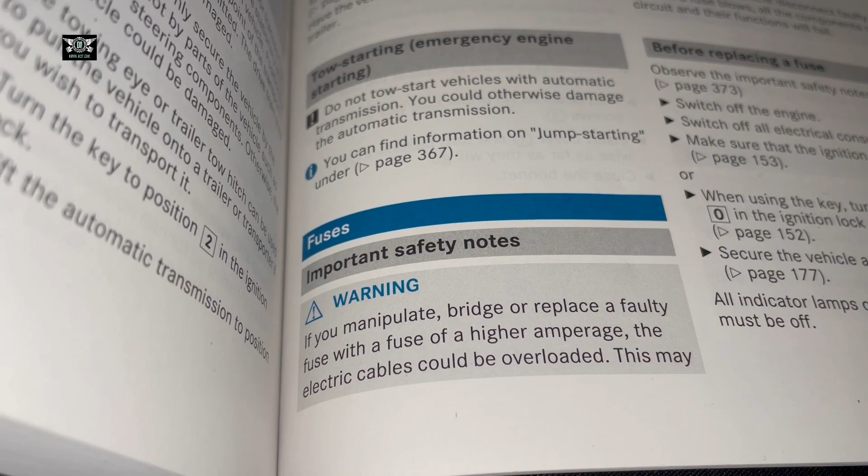So if you look at your manual, if you have one, and you open page 373, it says fuses, and it gives you a number of warnings and how to change fuses and whatnot. So it's a good idea to always check.

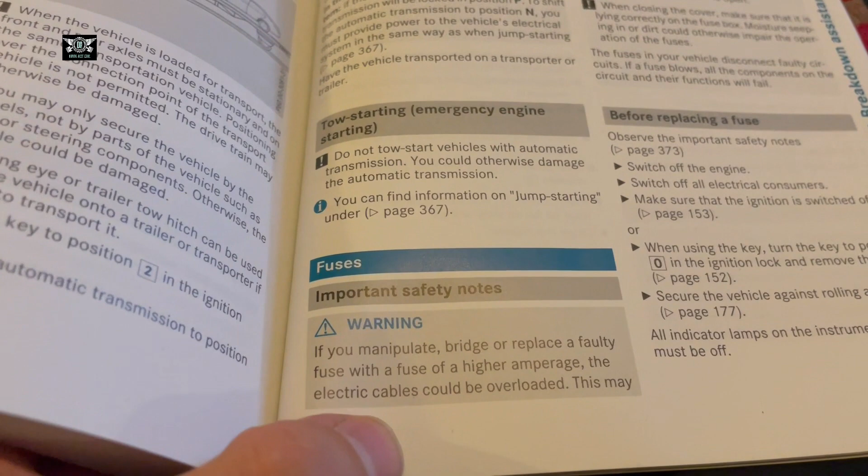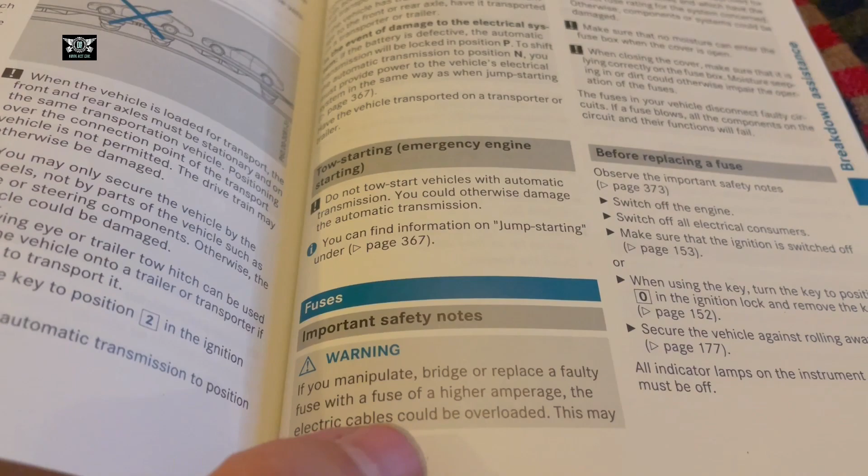As I was saying, it's important to read the warnings here that they give you, such as telling you not to replace fuses with higher amperage fuses, or try to bridge fuses or whatnot, because you can cause other kind of problems. You can even cause a fire.

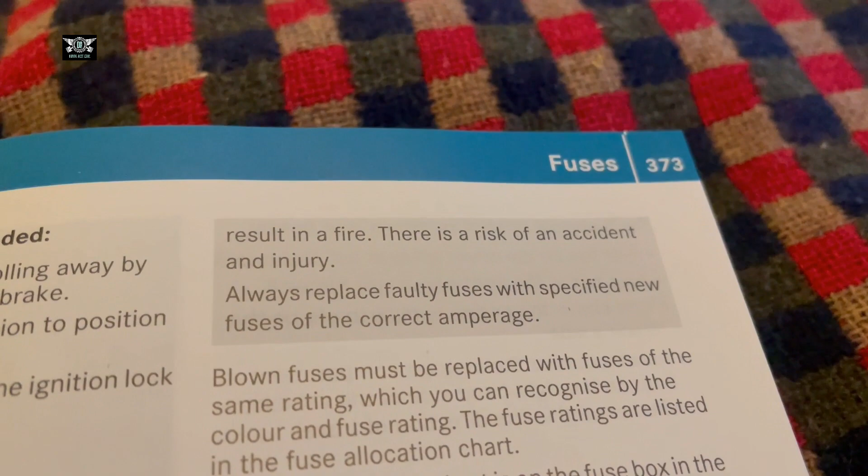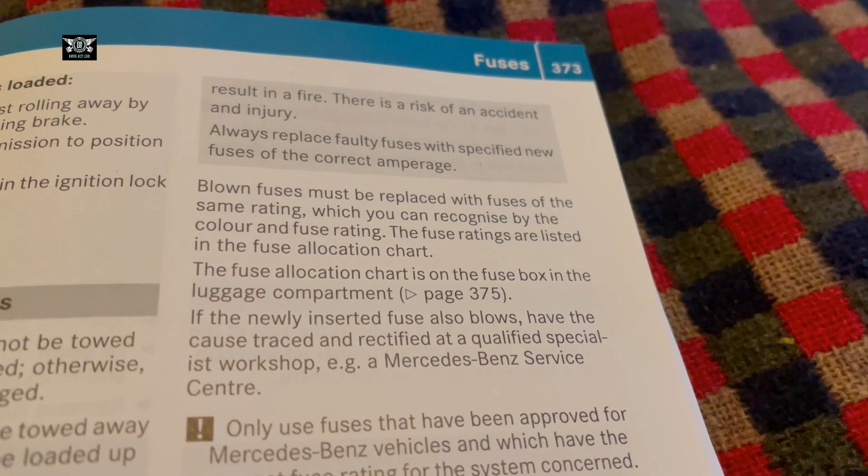And as it says, there is a risk of an accident and injury. Always replace fuses with specific new fuses of the correct amperage. So just follow the instructions here.

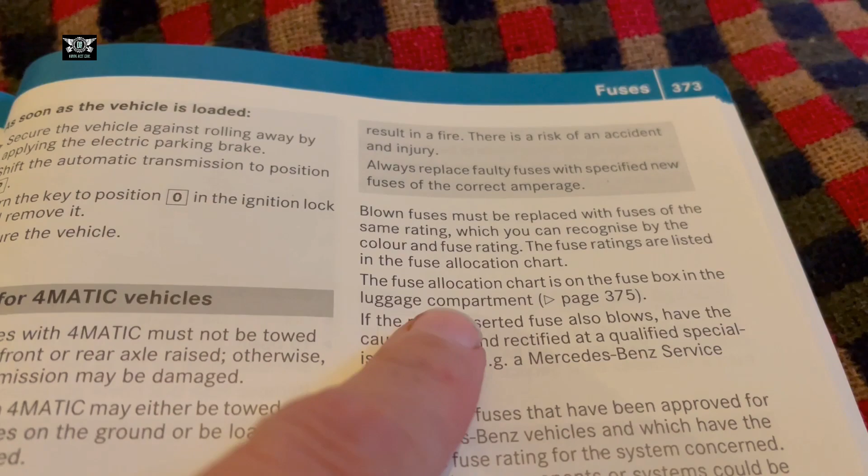Also tells you the chart. So the fuse allocation chart, it's on the fuse box in the luggage compartment. So that's where I got that from. I just took it out in order to put it on the video here.

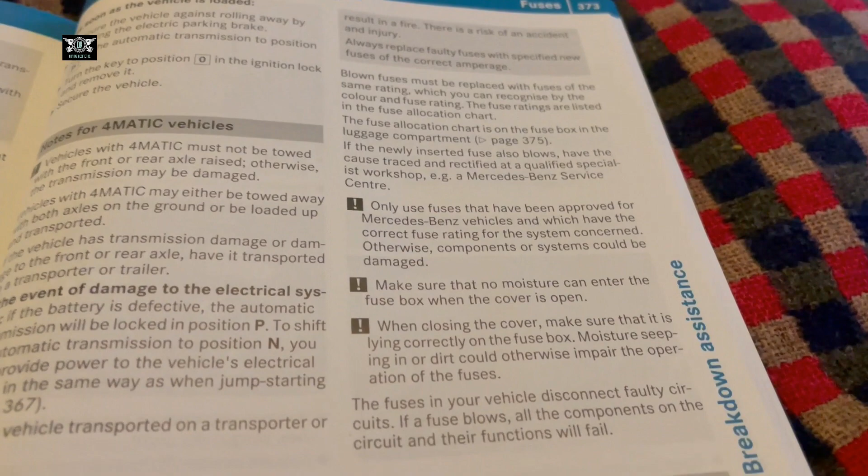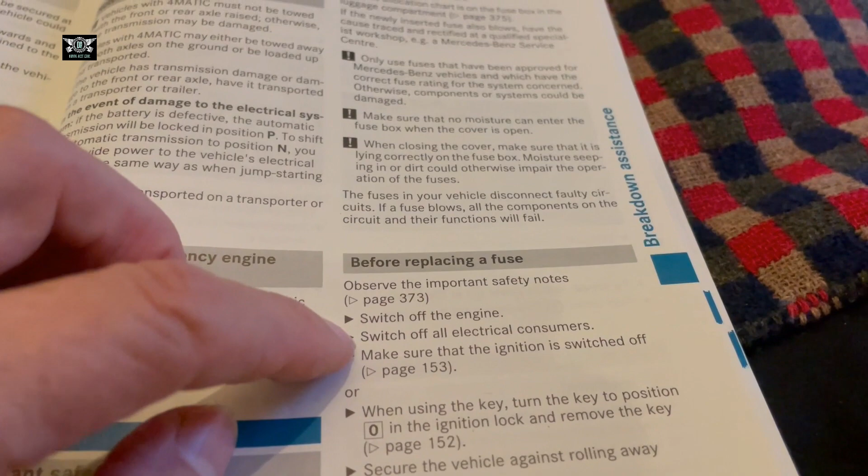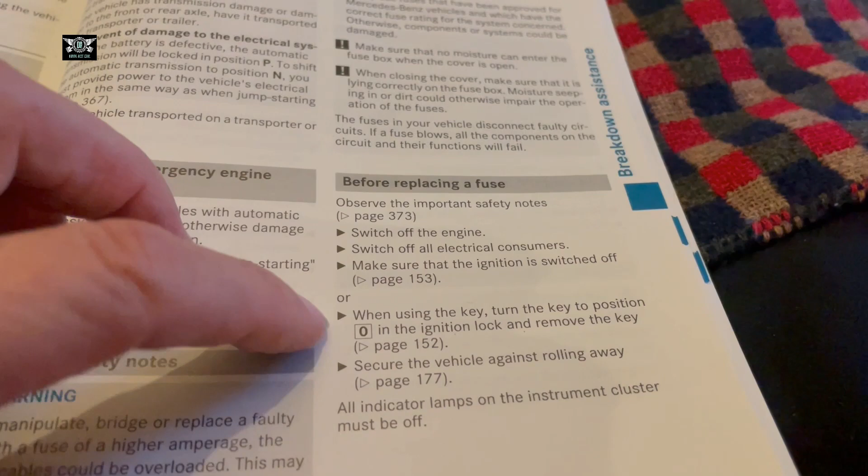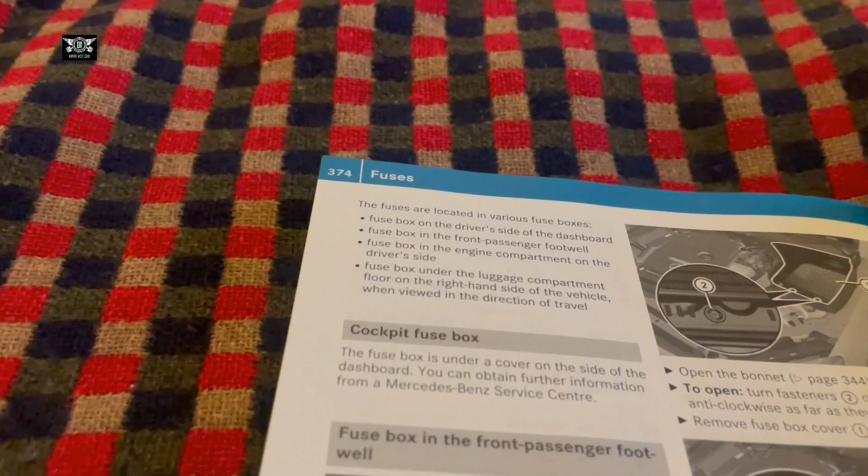And then you'll come to this place here where it also tells you, before replacing a fuse, observe the important safety notes. Switch off the engine, switch off all electrical consumers, make sure the ignition is switched off, or when using the key, turn the key to position 0 in the ignition, lock and remove the key, secure the vehicle against rolling away and whatnot. So just follow the safety procedures that they give you.

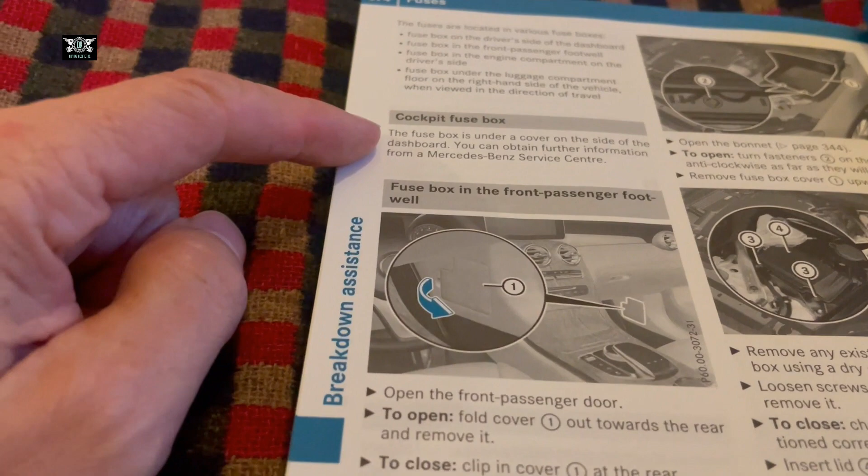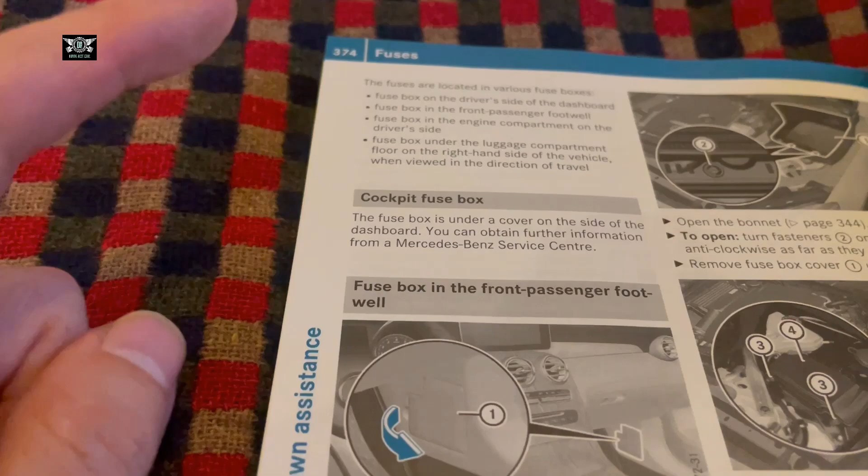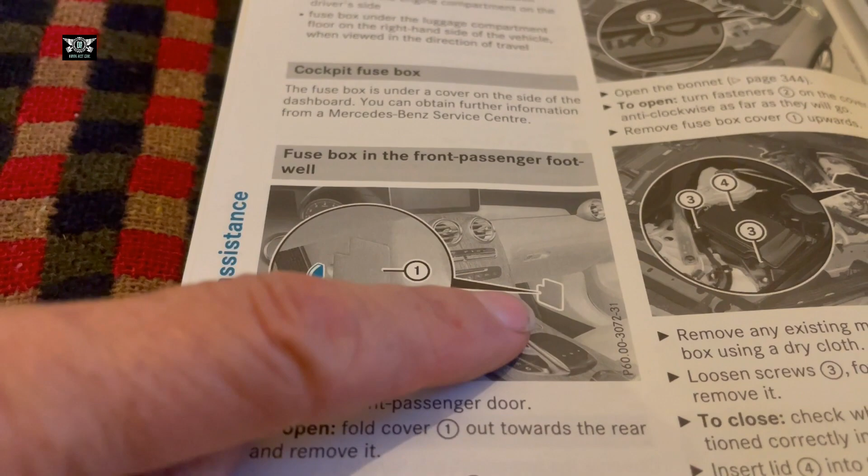So there are fuses in the cockpit fuse box. The fuse box is under a cover on the side of the dashboard. You can obtain further information from Mercedes-Benz Service Center, and this is where they are telling you the fuses are. So they are on a panel on the side as shown there, and we'll have a look at that.

In this picture, they're showing you a left-hand drive, but the car I have is a right-hand drive. So the steering is on this side, and this box is on the other side. So we'll have a look at that anyway.

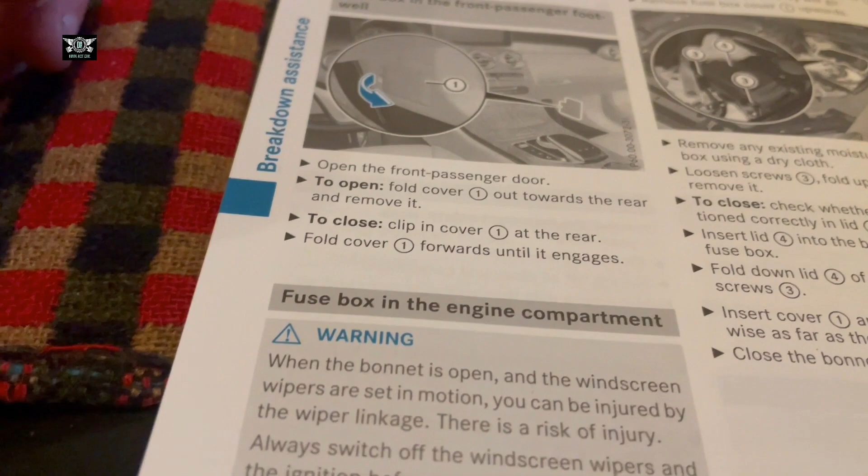And then you have fuses in the engine compartment. Again, you have another warning there. And for the fuses on the engine compartment, you need to remove 2 little tabs and then lift the cover up.

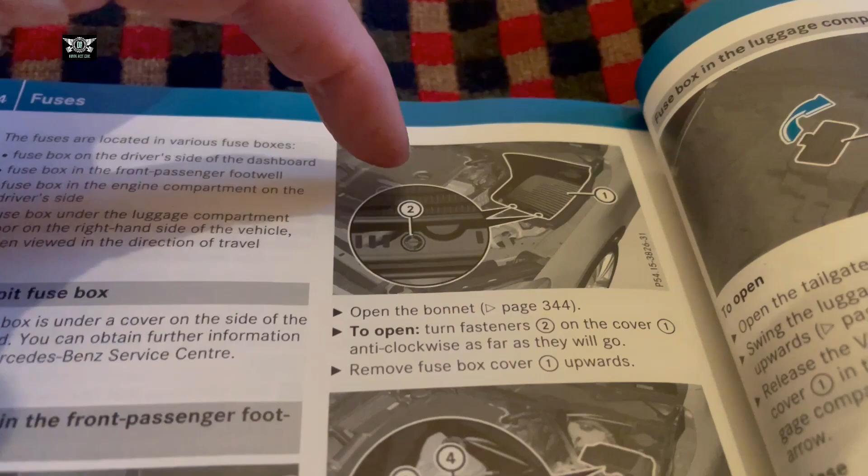Now again, this picture is showing you the right hand side if you're in front of the car. However, in this model it's on the left hand side.

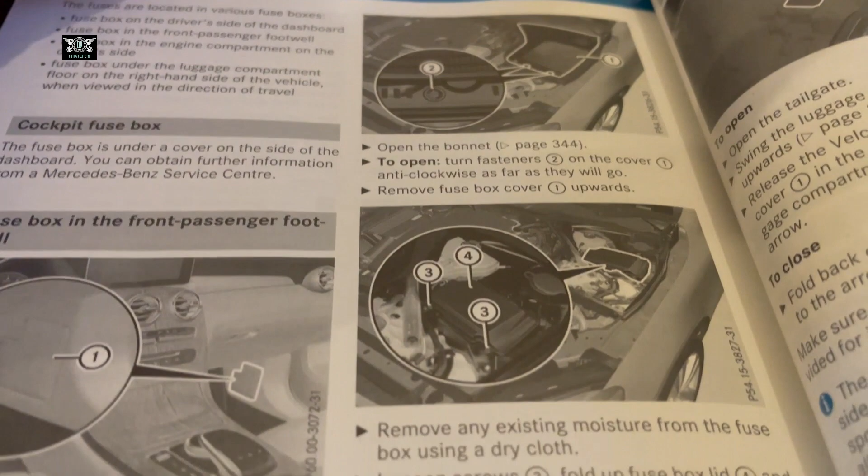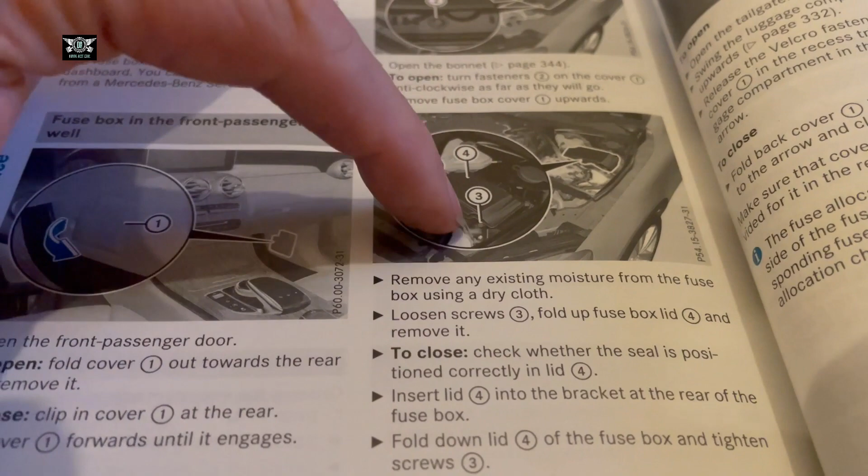And then once you lift that cover, you'll see the fuse box there, and you need to remove some Torx screws, 3 of them. Loosen the screws and fold up the fuse box lid and remove it. So we'll do that in a minute.

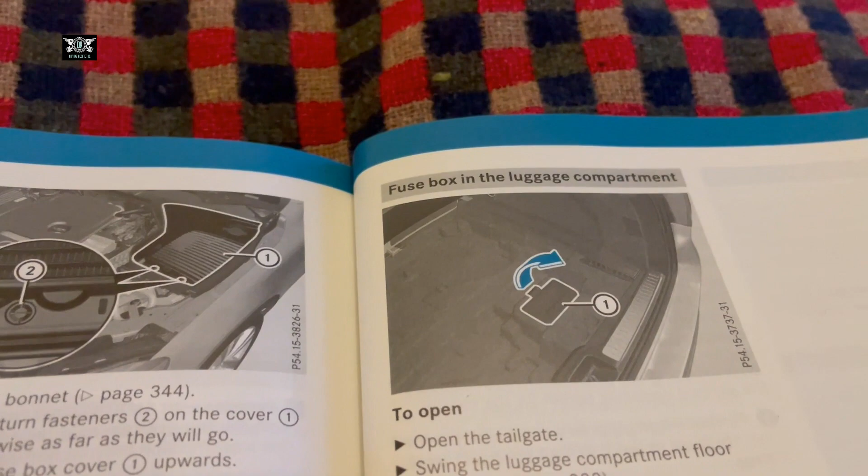And then we have a fuse box in the luggage compartment. So you open the boot and you will find a bit of carpet that is covering the fuse box. So again, we'll have a look at that in a minute.

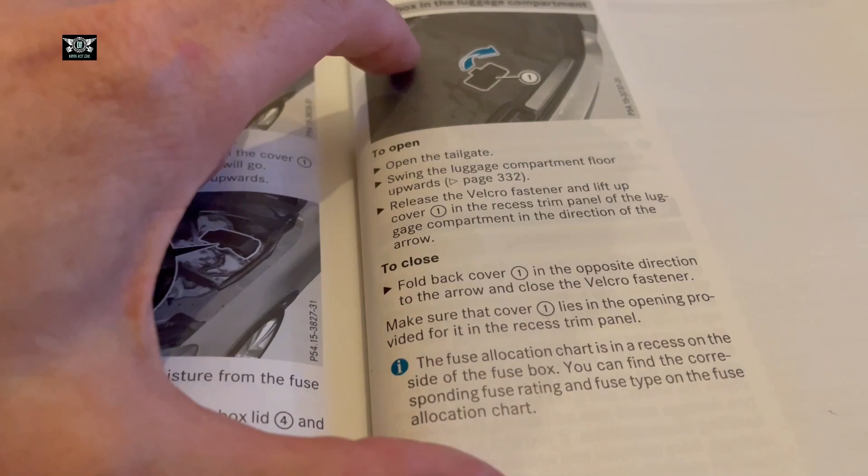And now here you can see, we'll concentrate on this list here because this is the English bit. This is German, I think.

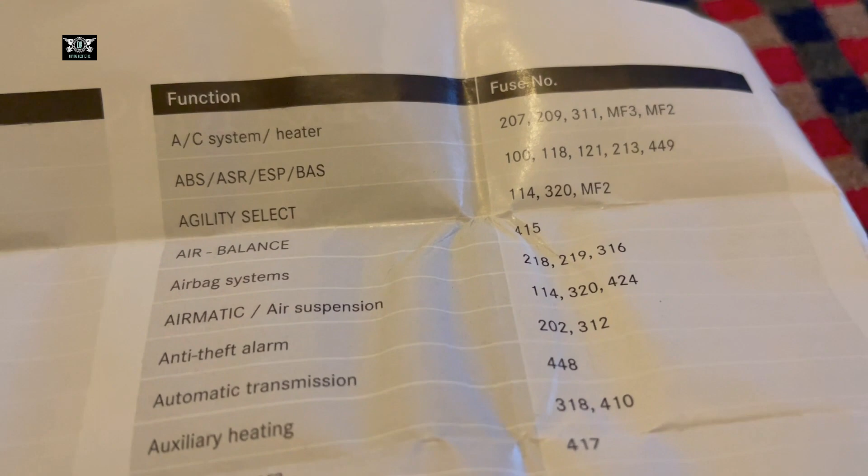I'm just going to slowly go down here, and if you're looking for a specific fuse, then you can pause the video as we go along and have a look.

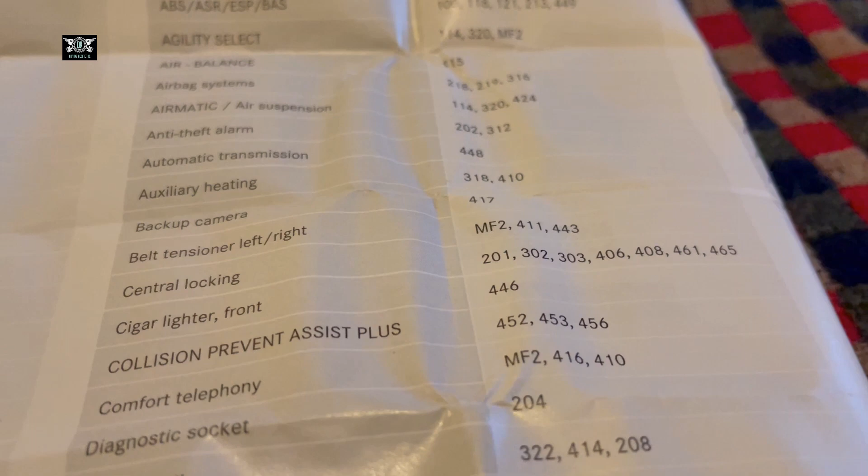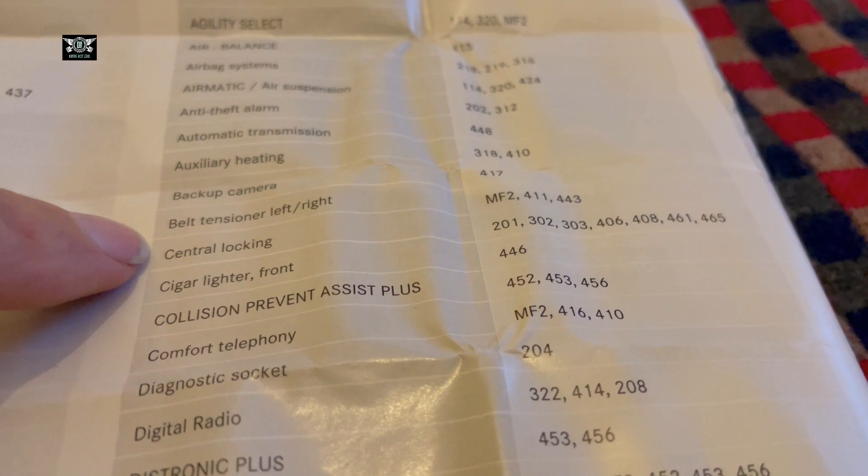Another thing to note is that if you're looking for a specific fuse, something like central locking, for example, you can see that central locking can be managed by quite a number of fuses there. So you do need to check them all.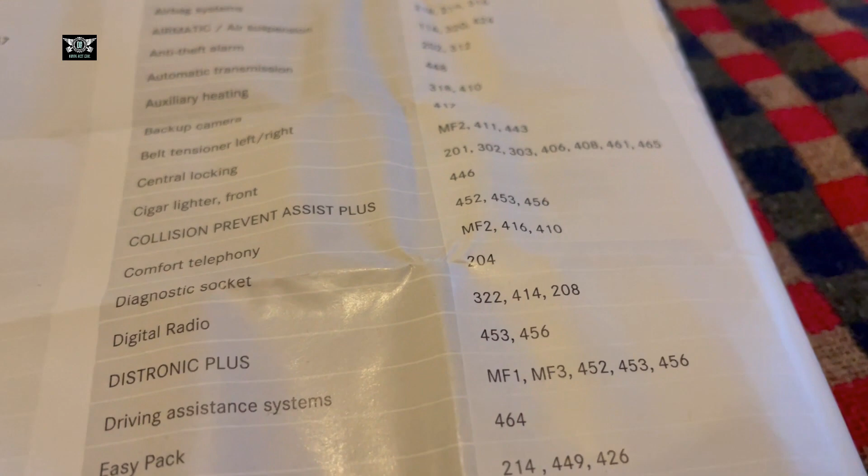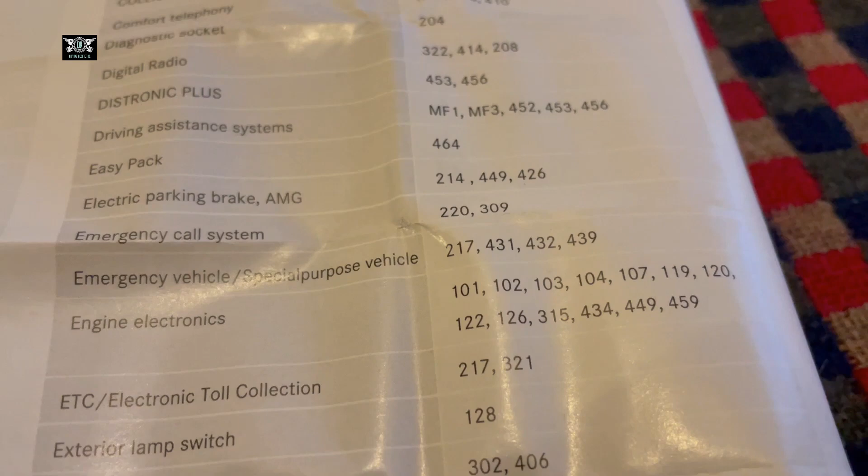Some of those may not be allocated in a fuse box. It just means that because those systems are shared, if your car doesn't have those extras, then you won't have the fuses. So not all fuses will be on all the slots. That's just something to remember.

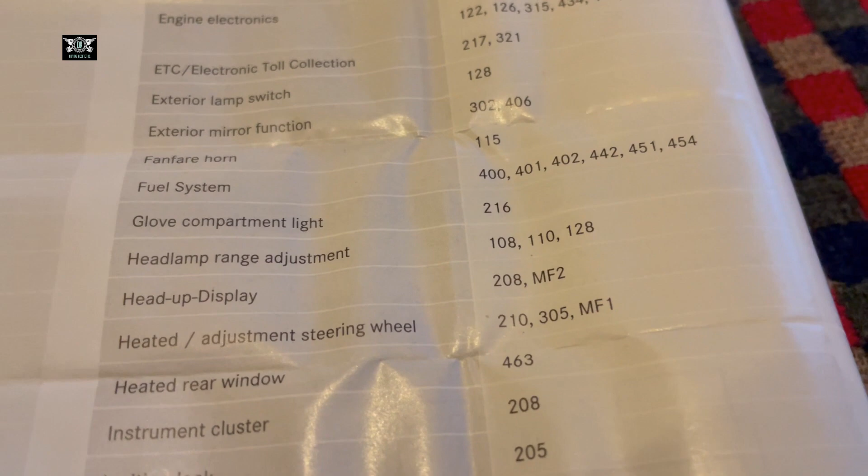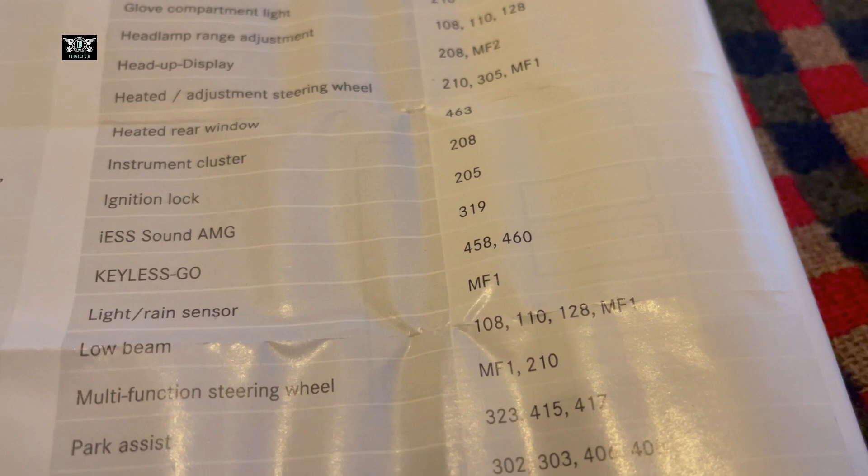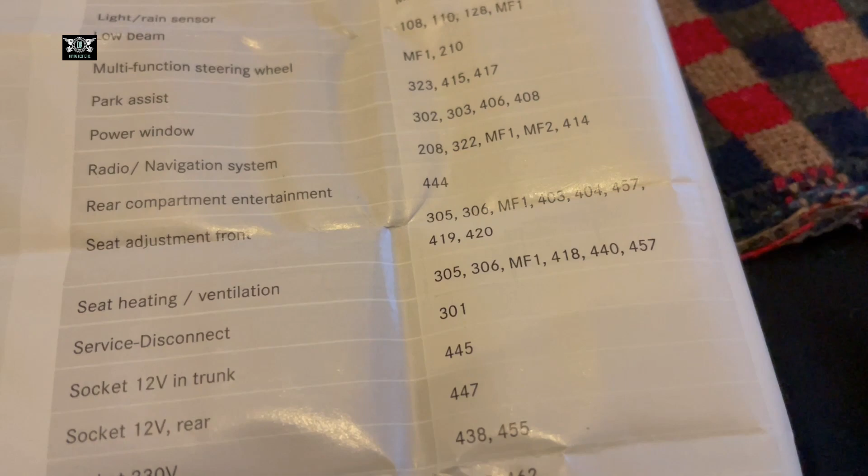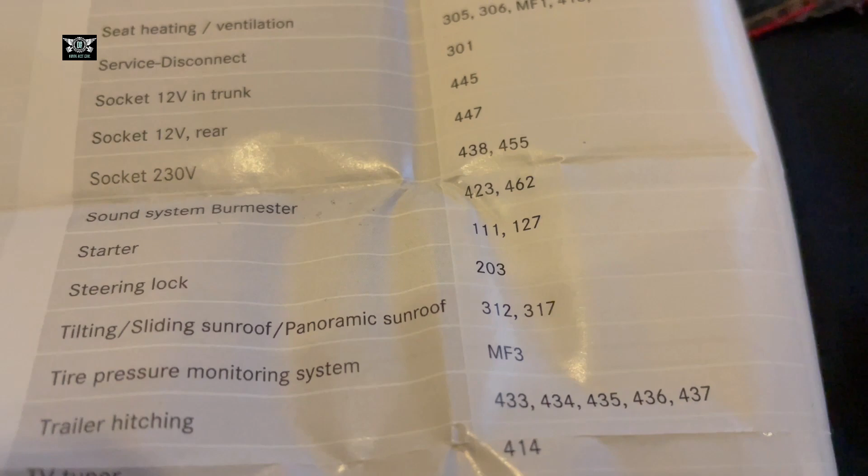And another thing is, this model I have is a diesel automatic, the 220 diesel. If you have a different version, if you have a manual, or you have a different engine size and whatnot, then this chart may be slightly different. So don't just rely on this chart for all the cars out there. This is for a GLC.

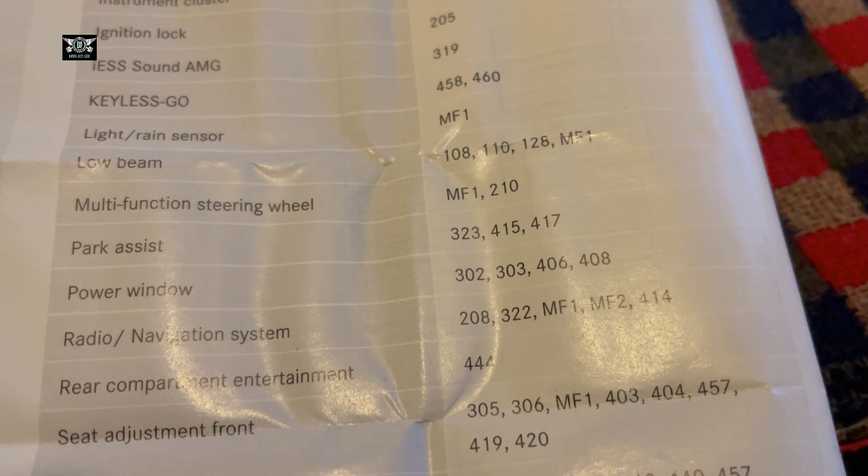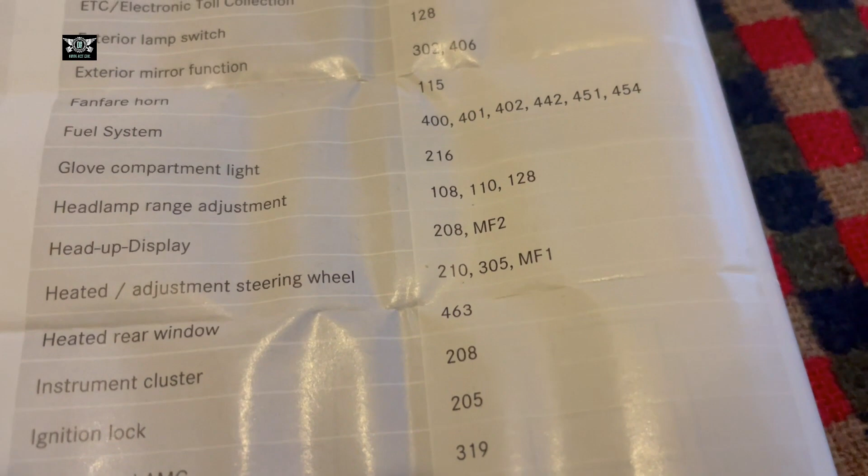However, just remember that not all GLCs will have the exact same allocations. And also this is a 2018, so the 2022 might be different.

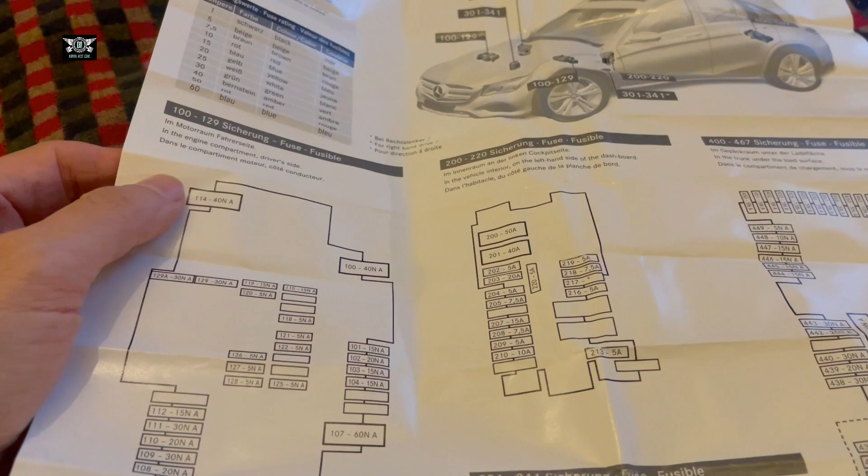So there we are. And also on the back of this chart, they also show you the fuse boxes and how the fuses are numbered. So it's a good idea to have a look at this chart.

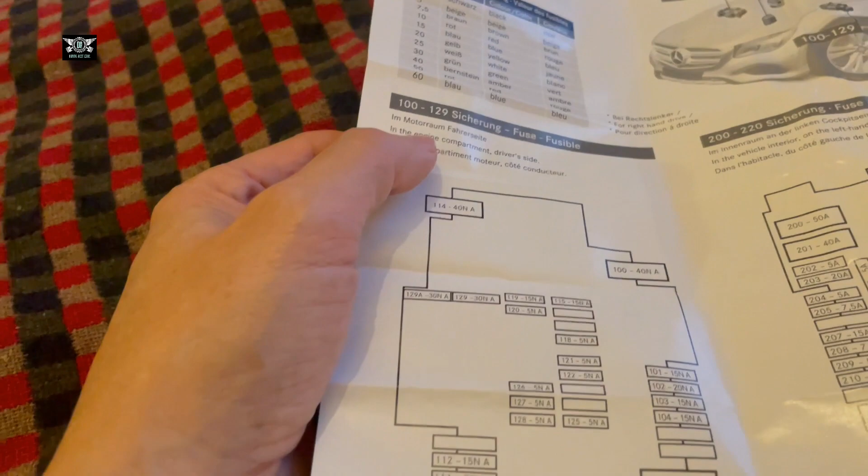So in the engine compartment, driver's side, it's this fuse box. We're gonna have a look at that. You can see the allocations for fuses, fuse numbers, 108, 9, 10, 11, 12, and whatnot. 128, 100, 114.

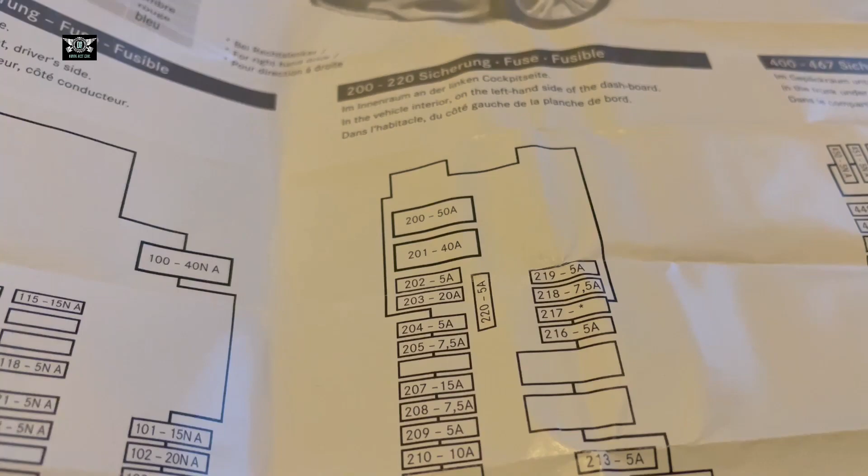Then it says in the vehicle interior on the left hand side of the dashboard. So this one here. So if you look at that number there, it's showing you that.

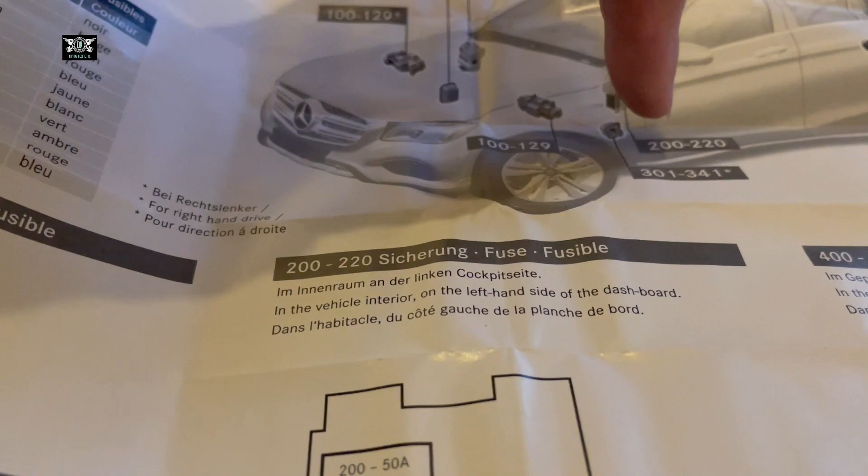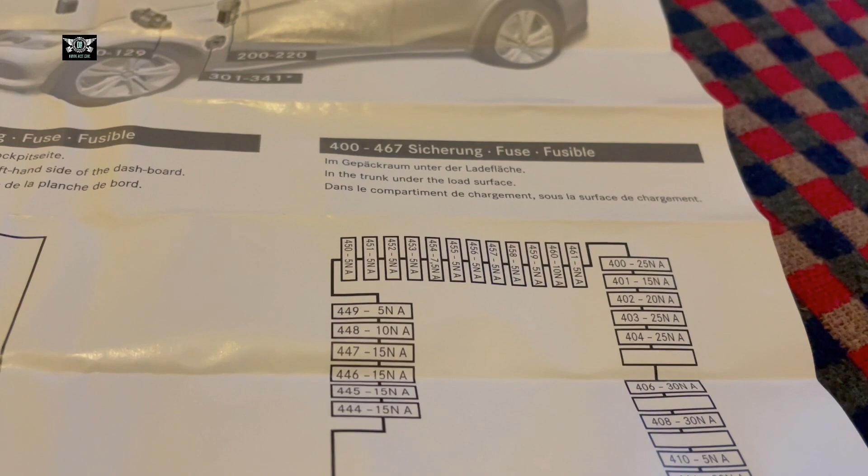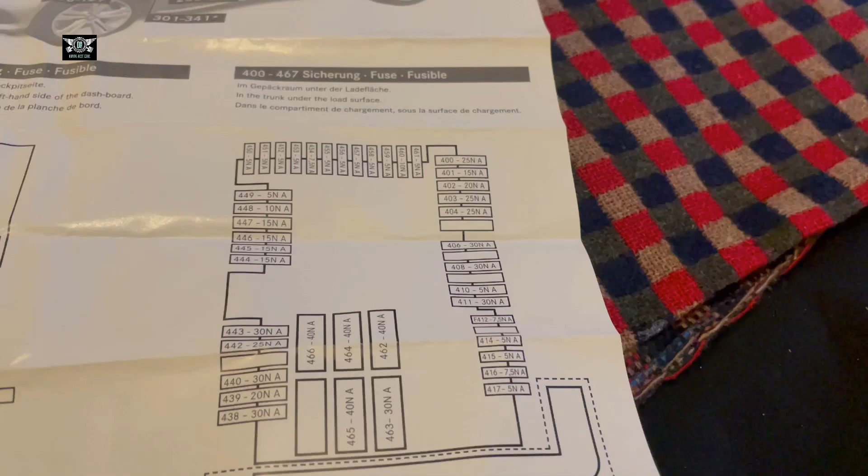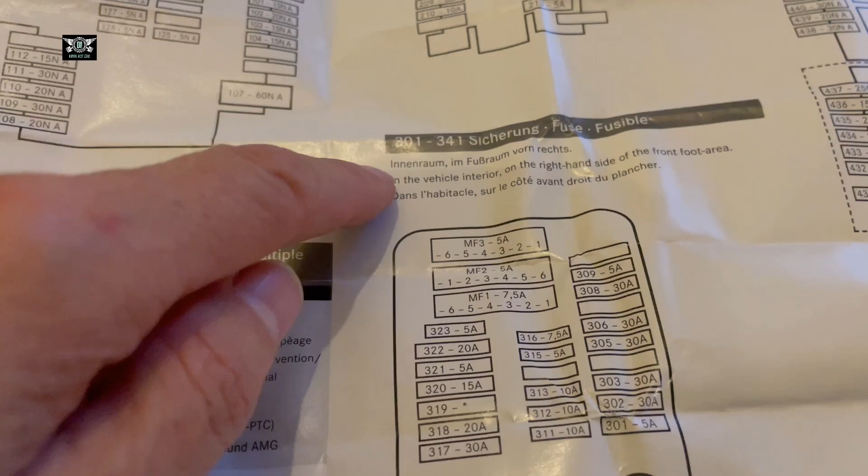And then it says in the trunk, under the load surface, there's another chart with allocated fuses. It says there it's optional, so you may not find that there. And another one here, it says in the vehicle interior on the right hand side of the front foot area.

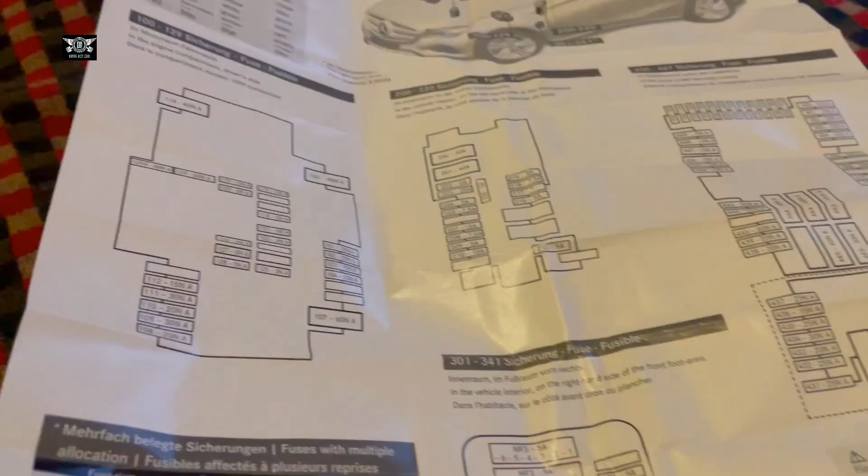So the manual shows us 3 fuse boxes, however here they're showing us 4. So as I was saying, the manual doesn't actually show this fuse box here. It shows you this one, and this one.

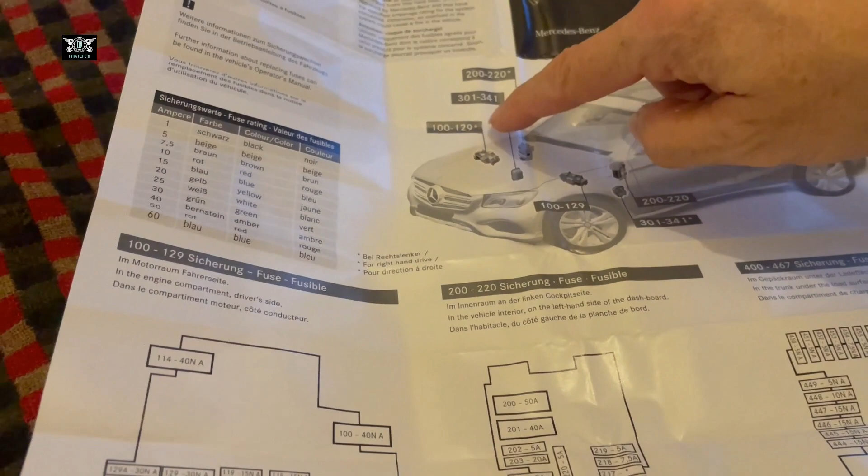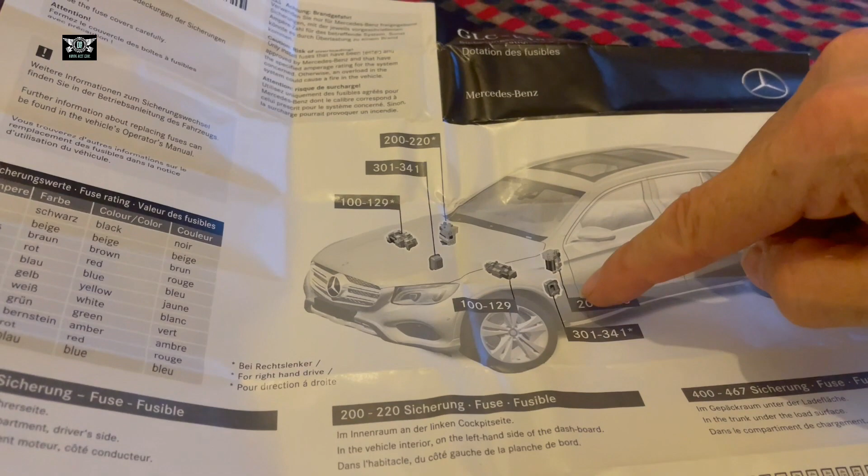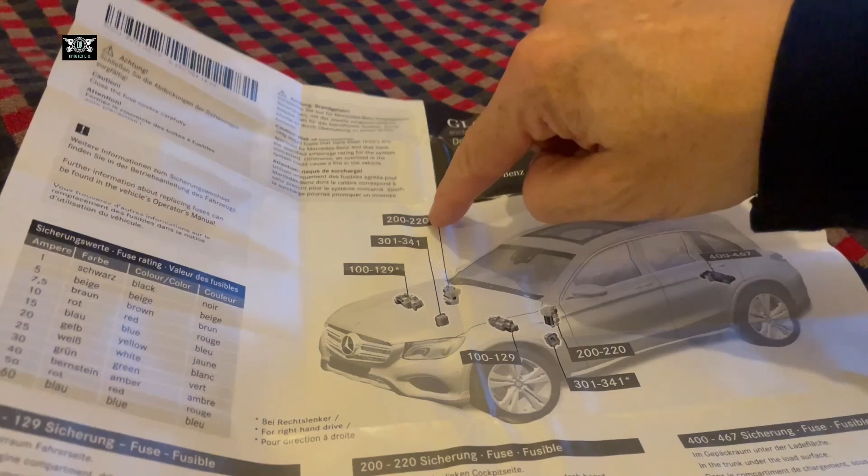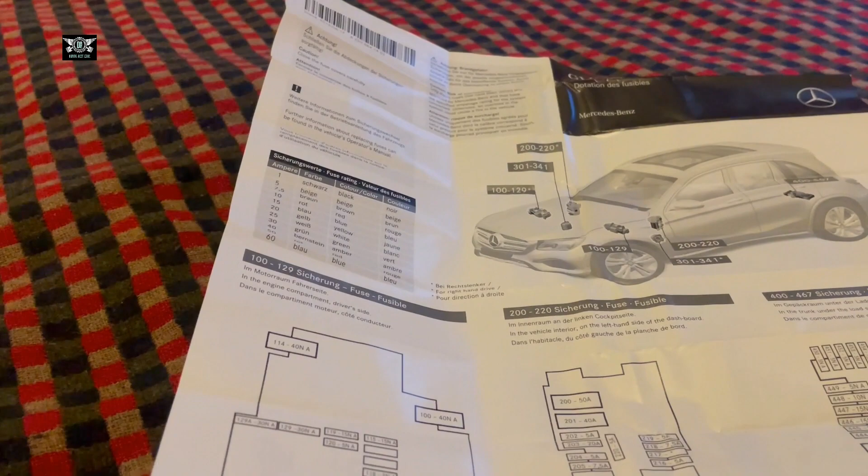Also the ones marked here with a little star are for the right hand drive model. So this fuse box here is located there on the right hand drive car. The same fuse box is located there on the other side on the left hand drive car. So here it's showing us 1, 2, 3, and 4 fuse boxes. Not really sure why the manual doesn't show that particular fuse box there, considering it's here.

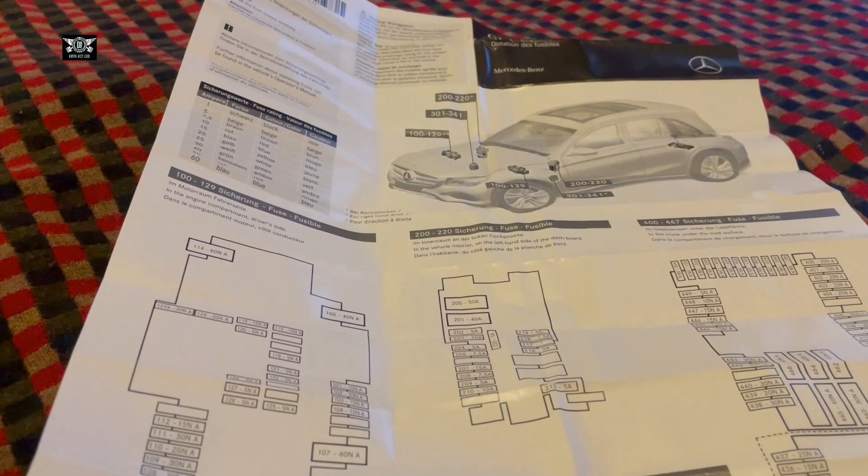But we'll have a look and see if it's there. If it's there, we'll take the cover out and have a look. If however, for some reason, they don't show it in the manual, it could be because those fuses are not the kind that are meant to be replaced by the general public. Then that's a different story.

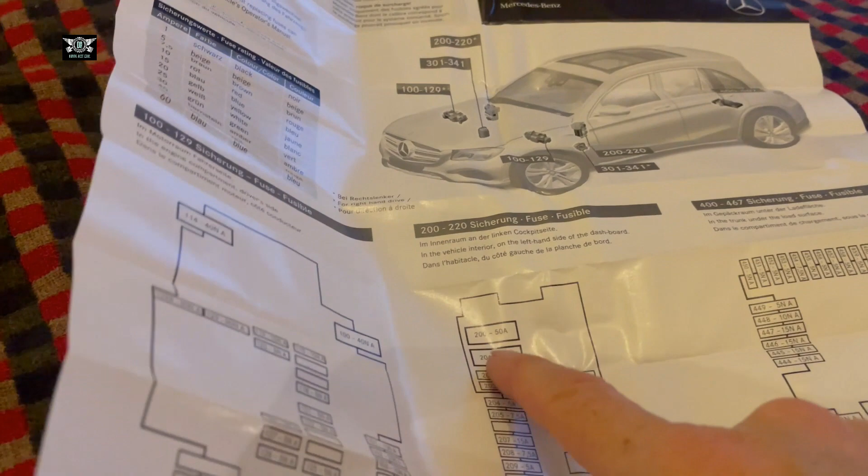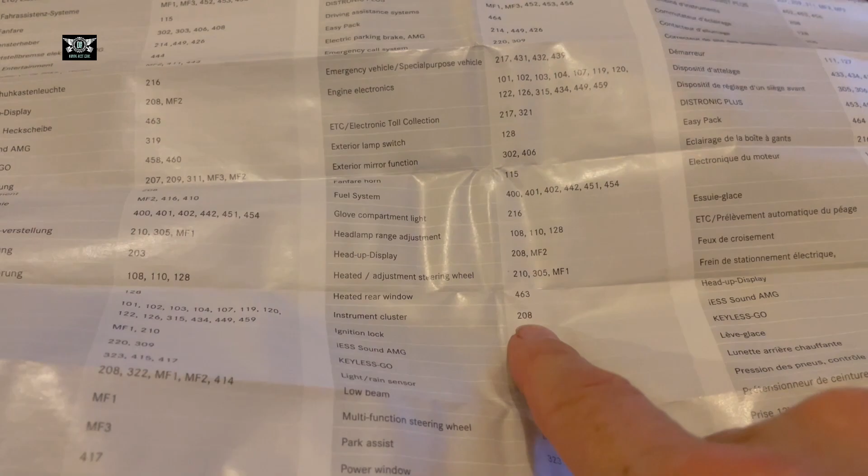So we have fuses from 200 to 213, 216 here, even 220. So from fuse number 200 to 220. There are fuses here like ignition lock 205, instrument cluster fuse 208. So again, the manual doesn't actually show that fuse box.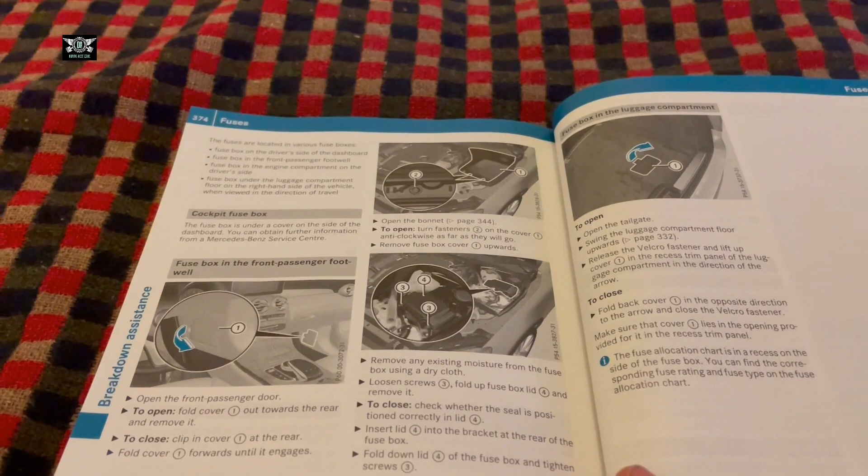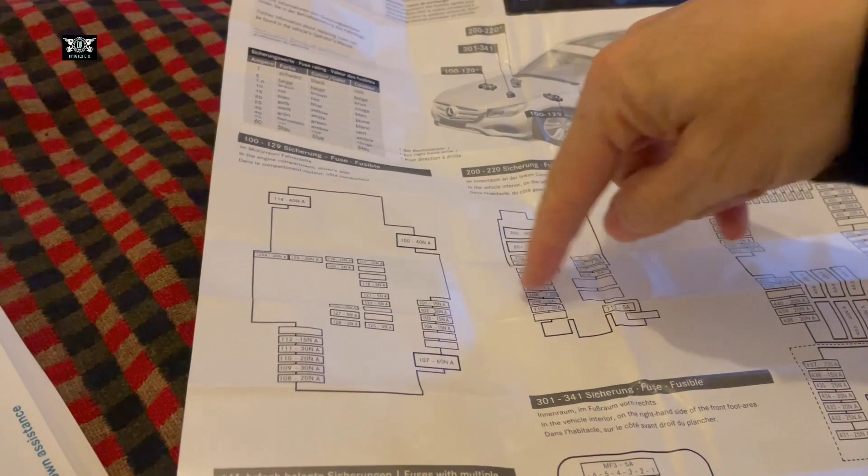Now again, whether this manual is made for the GLC 220D, which maybe doesn't have that fuse box, I don't know. So this could be a general chart which includes other models. That's why we'll have a physical look and see if that exists on this car. So let's get to the car and have a look.

Okay, so I'm at the car now, and we can have a look at the fuse boxes shown in the manual. In the manual they show us 3 fuse boxes. In the list of fuse allocations they show 4, but I have checked the panels on the sides and there's nothing. So I'm just going to concentrate on the 3 fuse boxes shown in the manual.

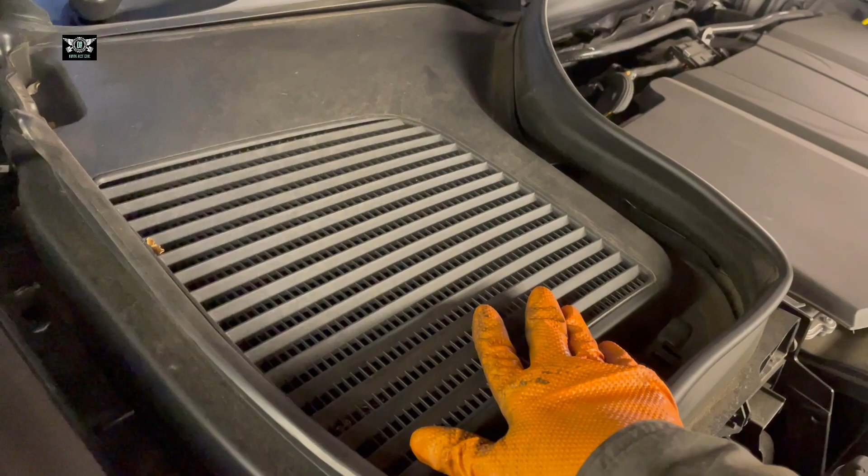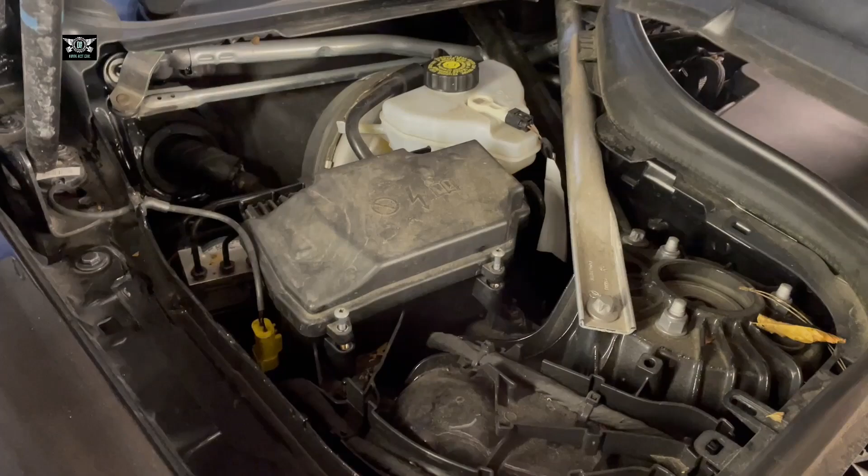It says driver side, and here in the UK it's right-hand drive, so the fuse box will be underneath this cover here. You need to twist these little pins to put them straight. I've already opened them, and then you're able to lift this cover, and once you lift that cover, the fuse box is this one here.

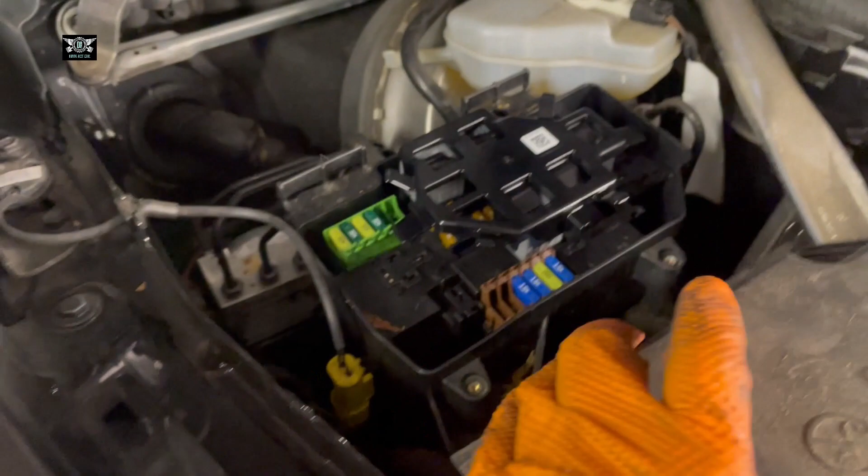You need to remove these, undo these Torx screws - they were a T20 Torx - and then you can lift this up, and this is where the fuses are. Let's take this little cover out. So that's where your fuses are, and you've got some relays there.

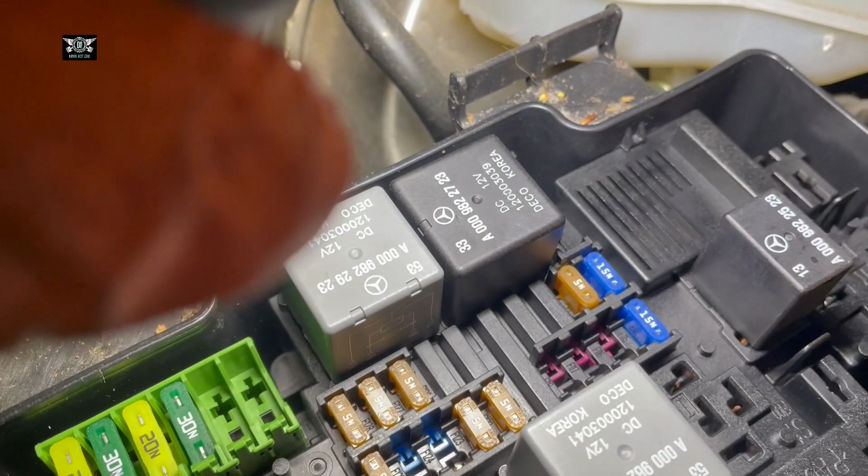You may see that the fuses are actually numbered as well. If you look closely you can see the numbers there, like F15, 16, 17, 18, F19, 20, and so on. Here it shows you number 1 there, down there, and then number 6 on this end. So that goes 1, 2, 3, 4, 5, 6, and so on. So that is where our first fuse box is, with some relays. The manual doesn't tell me what the relays are for, so I can't tell you what those relays are for either - that will have to be a Google search if you want to find out.

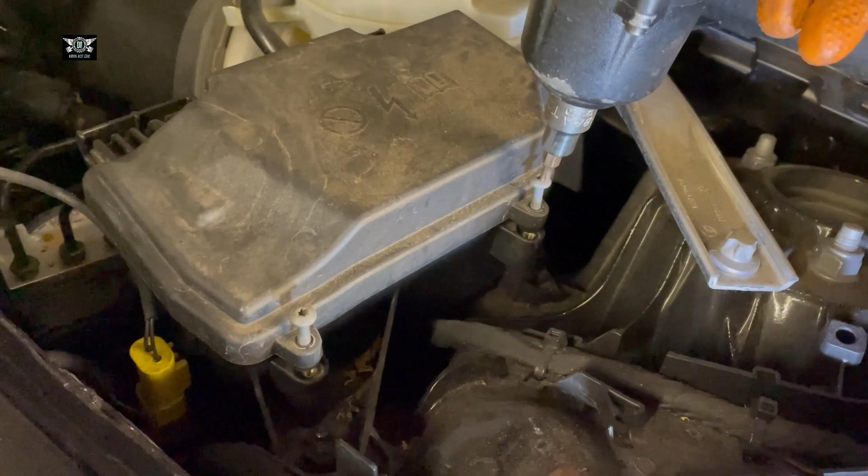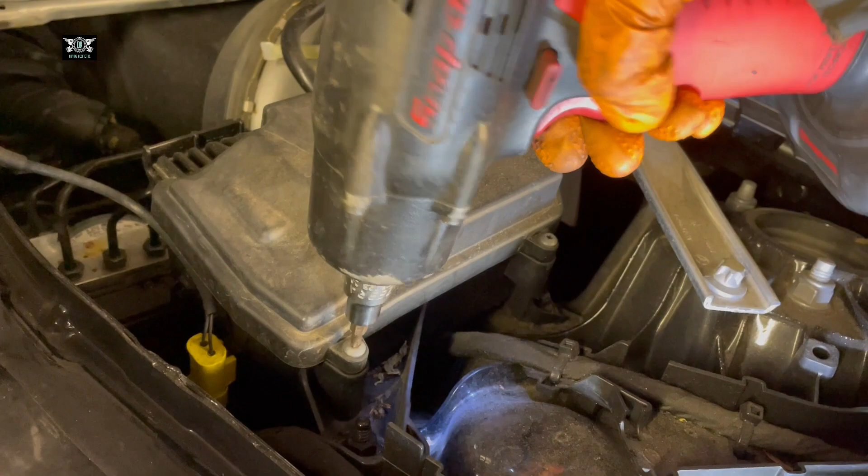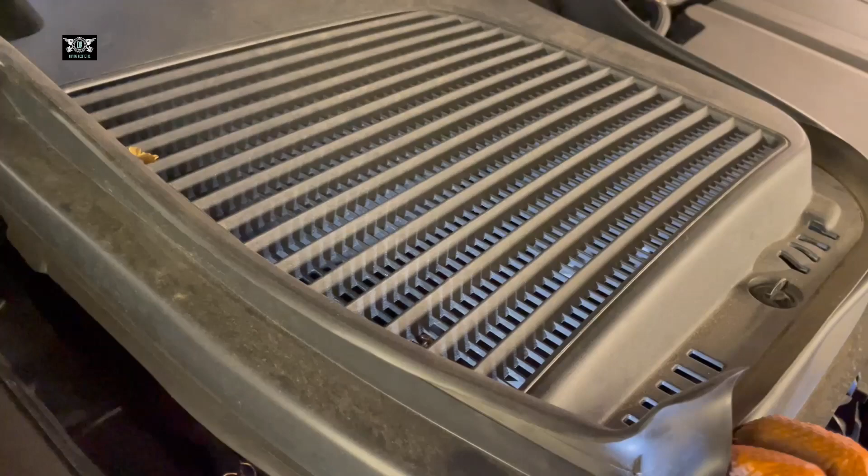Okay, let me just close this box. No need to over tighten those. Fit this cover back on there. So I'll just fit this cover back on and we'll go and have a look at the other fuse box.

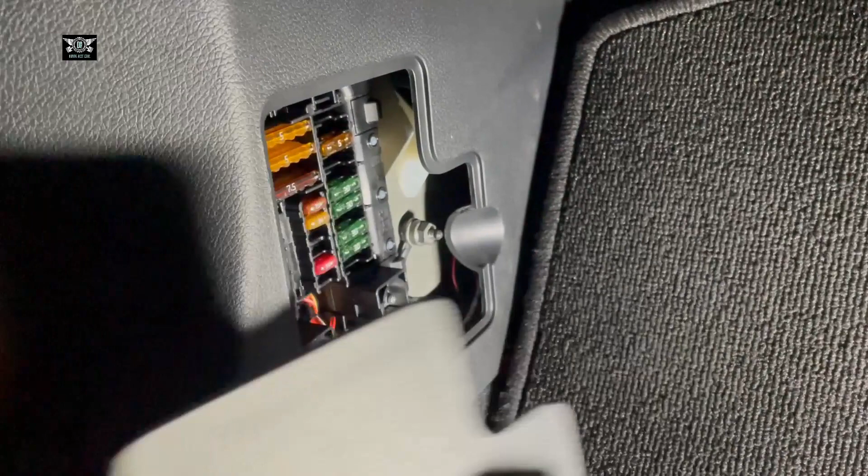Okay, so passenger side footwell, to the left here, there's this cover. Let's try to get my light there. Pull the cover out, and the fuses are right there.

And as I said, I checked to see if there were any fuses in this panel and the other side, and there was nothing. So let's just stick to what the manual says.

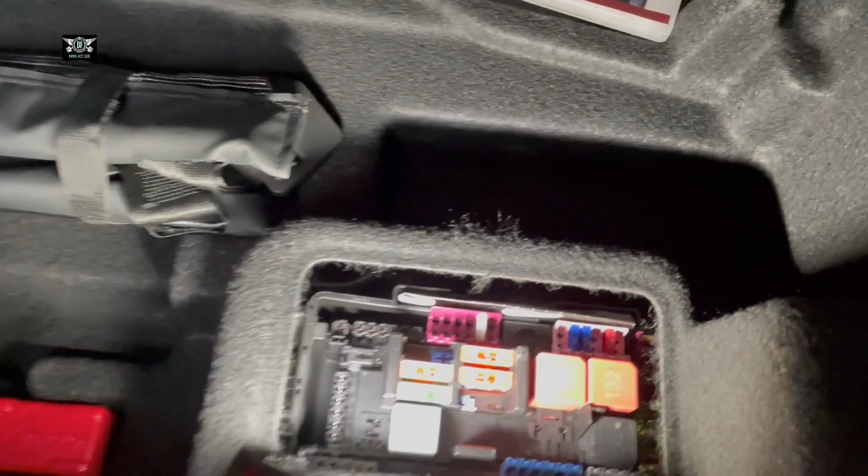And now we go to the boot here. If you open the boot and open this cover, you'll reveal this area, and in here is this cutout, and if you lift that cutout, that's where the fuses are. And again, some relays, and also the fuse card with the allocations is just there.

And this is what we have. And again, the fuses are numbered, so you can't really go wrong. And another thing is, not every fuse is in the slot, as we already mentioned. If your car doesn't have those features, then you won't have those fuses either.

And that's pretty much it, really. So, having shown you that,